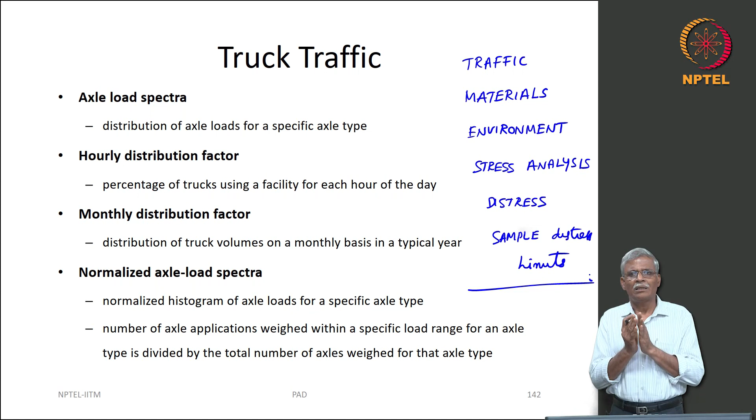Traffic, materials, environment, stress analysis, distress, and I will also show you some sample distress limits. To give due credit, AASHTO or the current MEPDG version is the one that actually put together traffic analysis on the most rigorous platform.

Let us take a look at each of these things. If you are watching this lecture, I request you to pause and write down these definitions. First and foremost is the axle load spectra: this is the distribution of axle loads for a specific axle type, determined as a statistical distribution.

Then comes the hourly distribution factor: the percentage of trucks using a facility for each hour of the day. This is used later in the distress computation, and this is where MEPDG relates traffic to material, to environment, to stress analysis, and finally to distress. Now you will understand how comprehensive this is.

To give a simple example, let us say you use the load equivalency factor and come out with 30 MSA. Now someone can ask, this 30 MSA is for 30 years, so let us take 1 month and say we have something like 0.1 MSA. Now, where is this 0.1 MSA applied — morning, afternoon, or evening?

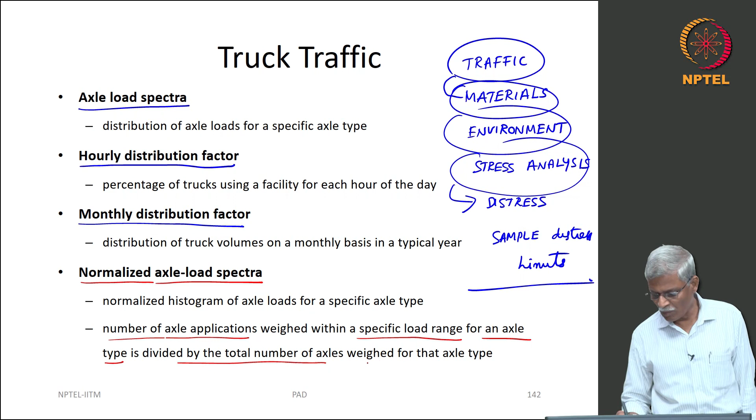When you say normalize, what you are trying to do is create a common platform, so that it becomes easy to compare across different axle types. So it means the number of axle applications within a specific load range for an axle type, divided by the total number of axles weighed for that particular axle type — that is your normalized axle load spectra.

To give an example, this is from a published paper — you can see this is a single axle, dual, and tandem. If you take a look, this is the variation you see for different types of vehicles: class 4, class 5, 6, 7, class 8, 9, 10. Each of these classes will have different types and different numbers of vehicles.

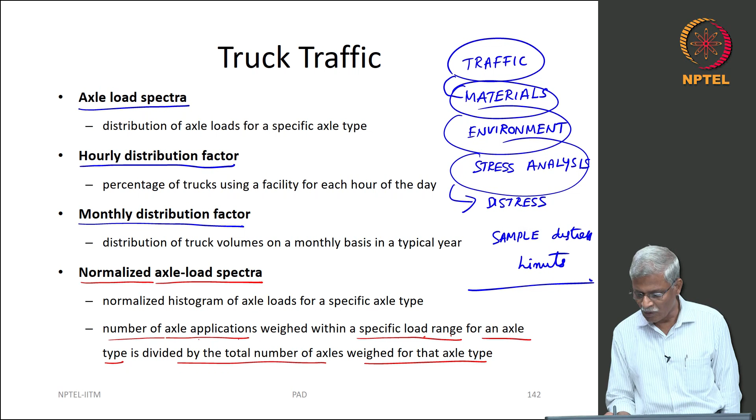So what you are now trying to do is put all of them on one platform, because we want to find out the axle load versus the percentage axle. So if class 8 had let us say 100 vehicles, class 9 had 50 vehicles, class 10 had 20 vehicles, what we will do is go back to the previous definition: number of axle applications within a specific load range for an axle type, divided by the total number of axles. So that is what we are trying to do here, dividing it by the number.

If you are really looking at dual, this whole thing, the middle one corresponds to the dual. So what you want to say here is 30% falls within this range, 15% falls within this range, maybe 12% falls within this range. So this is the normalized axle load spectra.

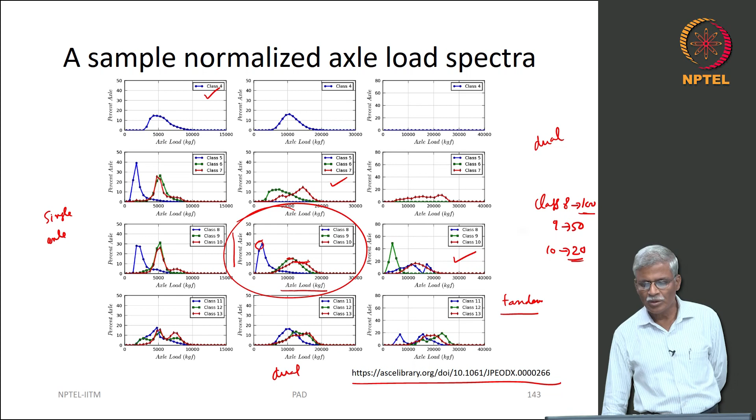Now comes the next classification, what is really called the truck classification distribution - the distribution of the number of truck applications for each truck classification for all the trucks counted. Let me reiterate, AASHTO will not do a load equivalency factor. AASHTO will take all the trucks for which you are collecting data from the field and apply it to the pavement, then compute the damage for each axle application. So all the truck data you are collecting has to be classified into different categories and distributions. We also have what is called the normalized truck classification distribution, which is a normalized distribution of the different truck classes within the traffic stream.

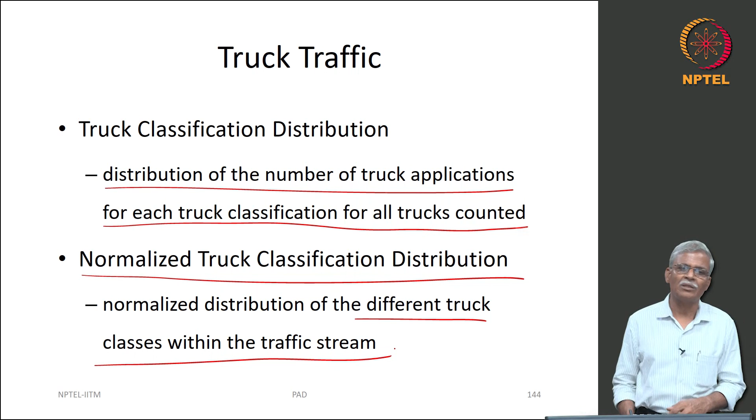Let me give a simple example. Truck traffic classification group means, for instance, if you take the major single trailer truck route, type 1, type 2, and some other types, which could come as 1, 2, 3. Now what you are saying is these 4 to 13 that you see are the different truck types. If you go and search, or I can share materials with you, truck class 4 will have one combination, truck class 13 could be something like dumper trucks.

What you really need to do is, if you take any truck route, that route is going to have almost these many trucks here, and it will be interesting to note that class 9 has a major proportion. Similarly, if you come to this TTC group here, you see this number has reduced, whereas this number seems slightly more here - this is more or less the basic idea with which these groups are created.

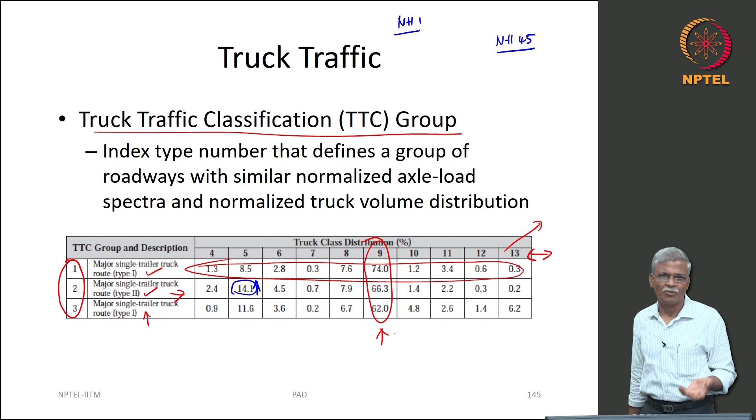So to understand: an index type number defines a group of roadways with similar normalized axle load spectra and normalized truck volume distribution. So let's say you are talking about NH 45, and some other NH 1 - each of these highways has different characteristics, as I have mentioned before. If you are a pavement designer, it is necessary for you to understand what type of highway you actually have. If it is NH 45, it may be one kind of highway that carries raw material from one place, sends it to a factory, gets it processed, and from there takes it to the port - that could be the characteristic feature of that particular highway.

Now what you need to do is analyze the traffic going along this particular highway in terms of the different truck classes likely to be using that facility, since you already have different classifications permitted by IRC. So you are going to say NH 45's predominant feature is this kind of category of trucks that are going to come, while NH 1's predominant feature will be some other category of vehicles. So this truck traffic classification group needs to be necessarily carried out - this is the most important thing.

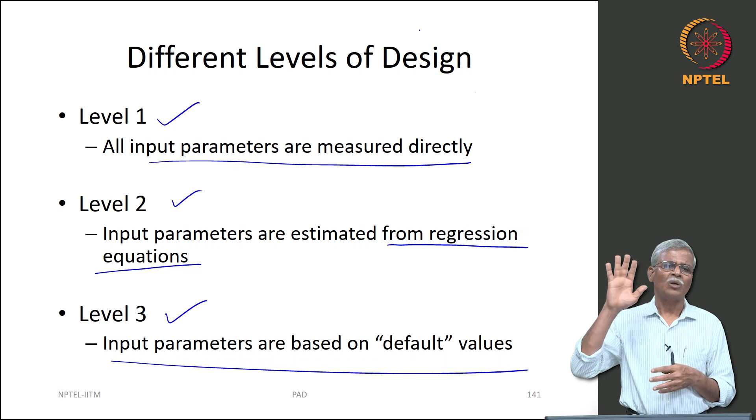So the point is, if you have these kinds of details worked out for the traffic part, then you do not really have any issue analyzing any national highway or state expressway as far as Indian conditions are concerned. Now why am I saying that? Let's go back to this - level 1. You will basically say for level 1 I need all the traffic data fresh, but if it is level 2, you will say I do not really need all the data, all I really need to do is find out what kind of TTC group and description it falls under.

Once you know it, most of the default values can be filled by you. That is the whole idea. Each highway has a specific distribution associated with it. The only thing that can vary is probably the intensity of the peaks or the volumes, but the nature of the distribution is not really going to vary, and that nature of the distribution has to be determined by you.

So if you are going to take a look at this particular highway and design it, all you really need to do is find out the total number of vehicles - you know the percentage distribution, so you will know the actual vehicle count, and now you can do the monthly distribution also, because we have talked about that. Let's say for this particular one it's 62%, and you want to ask how much is the monthly distribution. Then after that you also want to ask what is the hourly distribution.

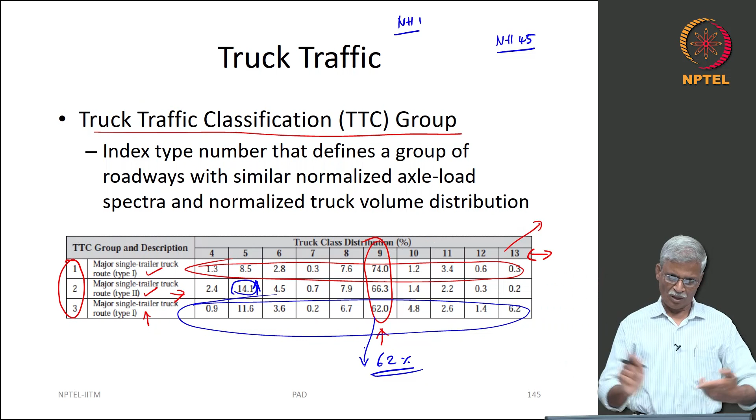So for every hour, every month, every year, for any specific truck, if you know what the distribution is, then doing the computation for the full year - taking into account the temperature conditions, material properties that change with respect to temperature, and loads that vary with respect to the hourly and monthly distribution - you can integrate all of them and compute the damage. That is the whole idea.

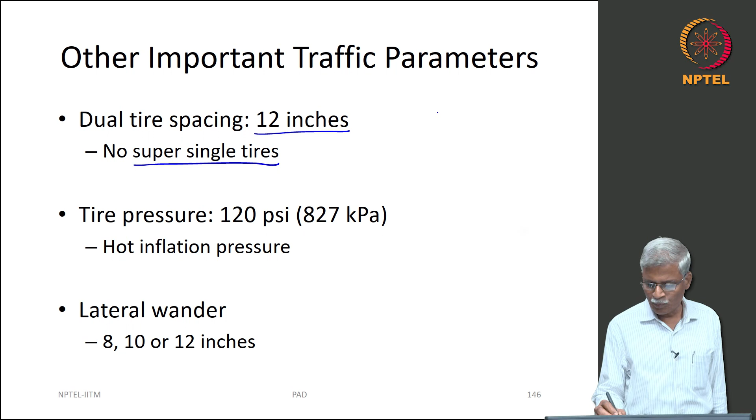There are a few other important traffic parameters that are mentioned but not actually measured. You can talk in terms of dual tire spacing. AASHTO also mentions what is really called a super single tire. In fact, if you go and take a look at some of the trucks on the national highway - let me draw something.

You might have something like this. Now these things might be lifted up or lowered depending upon the load that it carries, and these single tires carry a lot more load than this one. So these are called super single tires. As of now, AASHTOWare will not consider it.

Now the tire pressure that they want you to use is 120 psi, which corresponds to around 827 kilopascal. What is the tire pressure used in IRC 37? You may want to take a look at it, and you may also want to know that the actual tire pressure used in Indian conditions is a lot more than what you will actually see.

If that is the case, your strains are going to increase, and the damage is going to be accelerated.

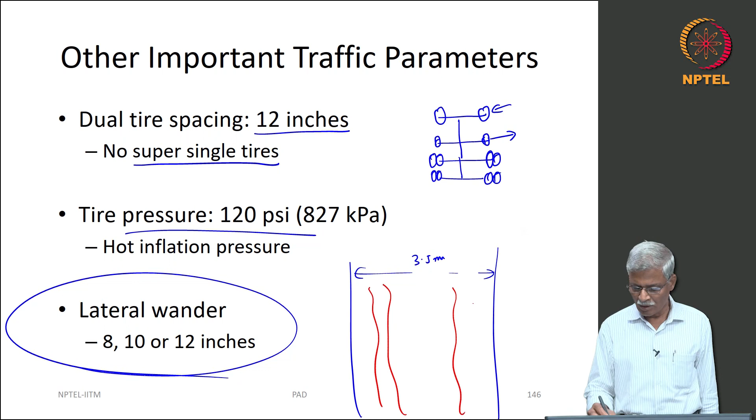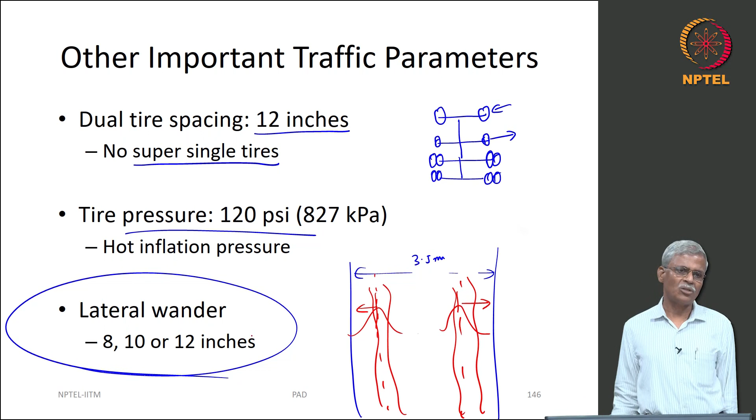Then there is also something called the lateral wander that you do. Basically, given any highway, you know the distance - 3.5 meters or 3.75 meters. So this is your location where you are going to have the axle repetition, and you can actually construct a distribution here. Now, from the mean, what is the standard deviation? That is what is really taken by you as some kind of wander. So it could be 8 inches, 10 inches, or 12 inches.

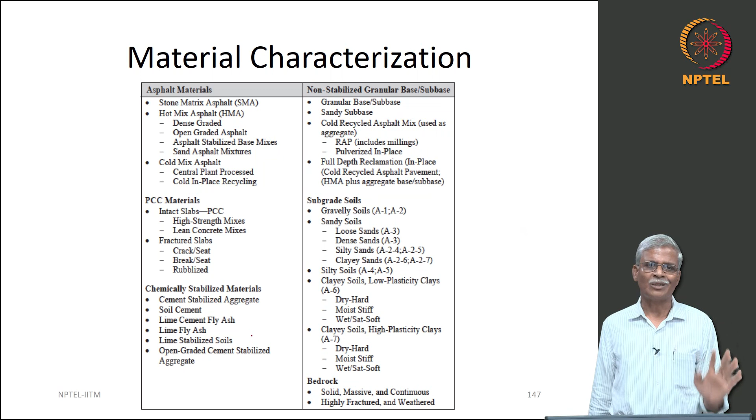So now we come to the next portion, which is really called the material characterization. What are all the materials that are allowed to be used as far as this AASHTOWare is concerned? I will be talking only about the bituminous material.

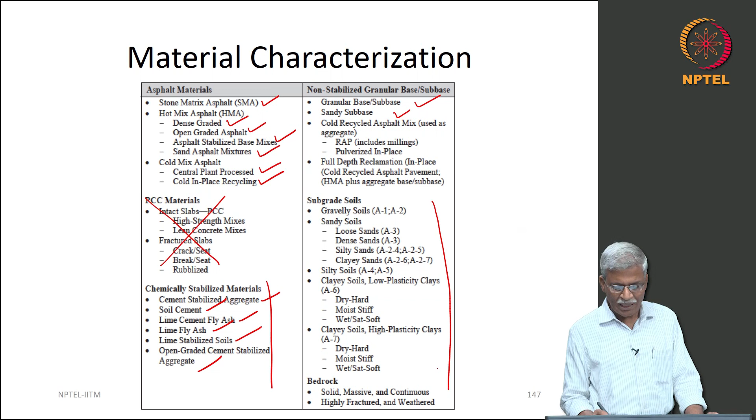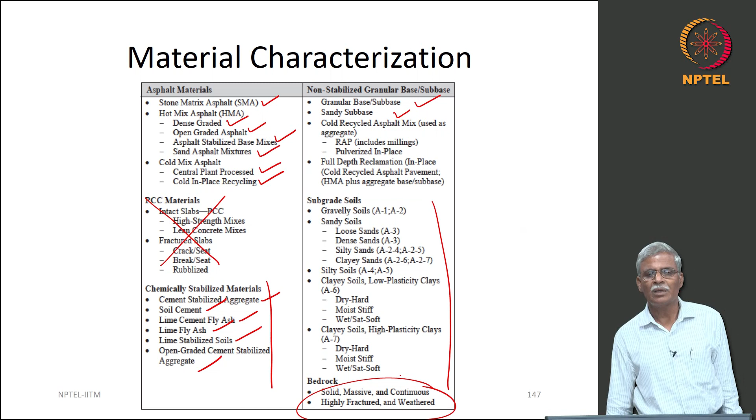You can have SMA, dense graded, open graded, asphalt stabilized base mixes, sand asphalt mixtures, and it could be central plant processed or cold in-place recycling. This technology could be with respect to foam or with respect to emulsion. You can have chemically stabilized material: cement stabilized aggregate, soil cement, lime cement fly ash, lime stabilized soils, open graded cement stabilized aggregate. Similarly, for non-stabilized granular base and sub-base, these are all the different types of mixes that can be used. The subgrade soil AASHTO classification is given here - A1, A2, A3, A4 and so on - and the bedrock details are given here. So this is the material that is likely to be used here.

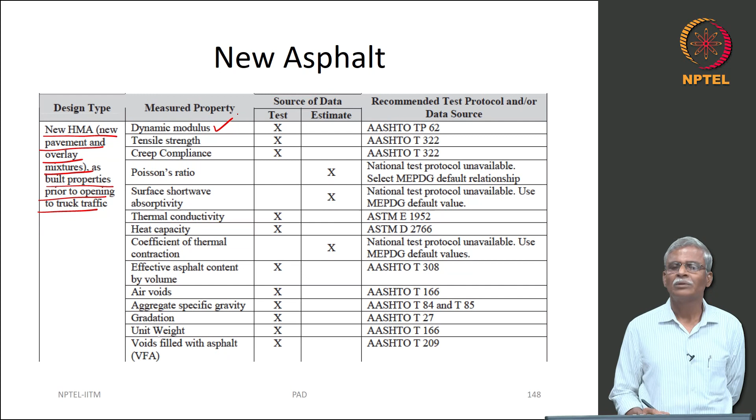Now, what are all the properties of the materials that you need to measure? As far as new HMA is concerned - that is new pavement and overlay mixtures - as built properties prior to opening to traffic, this is the dynamic modulus. We have discussed all of this in our material characterization of bituminous material. You can measure the tensile strength. Now you need to understand these are values that are expected to be tested, not estimated, and these are all the AASHTO or ASTM guidelines that are available here.

So, this is Poisson's ratio, they want you to estimate it.

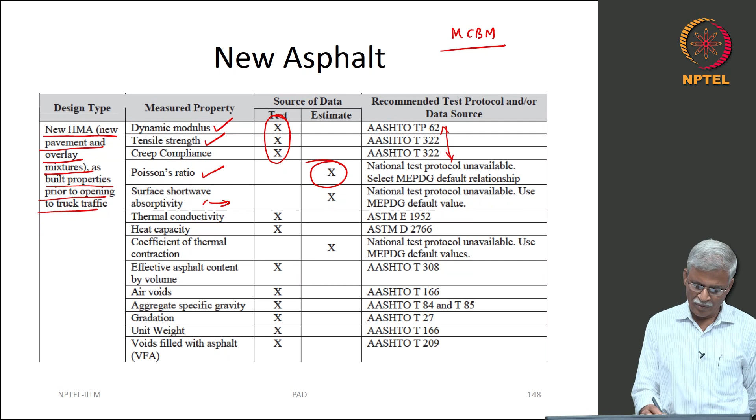You can leave this part, I will not be discussing this, because these are some of the things that will tell you to construct the heat transfer model that should be used for estimating the temperature within a pavement layer from the surface.

Okay, so these are all some of the things. The effective asphalt content by volume goes for the fatigue calculations, air voids, aggregate specific gravity, gradation, unit weight, voids filled with asphalt - so all of this goes into the fatigue calculations.

So now you can understand these are the sequences that need to be determined, and in fact, ideally all this information should be detailed and explained in IRC 37.

IRC should be part of it, FWD related information should be part of it, mix design should be part of it, because when you are really talking about pavement design, you are not really talking about pavement design alone, you are talking about analysis of traffic, material characterization, distress characterization and everything.

So that is why the overall AASHTO pavement design method that you see here, the green color book that I showed you, maybe 180 pages.

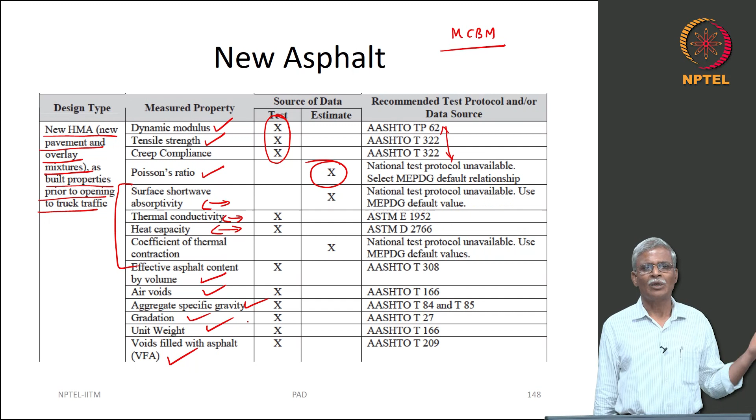But the original AASHTO design guide, with so many annexures and appendices and all those things, runs to more than 2000 pages, right.

So when you are talking about an existing HMA in which you are trying to find out what is the structural capacity, you are talking about running an FWD and computing the back calculated modulus, Poisson's ratio is estimated, unit weight, asphalt content, gradation, air voids and asphalt recovery.

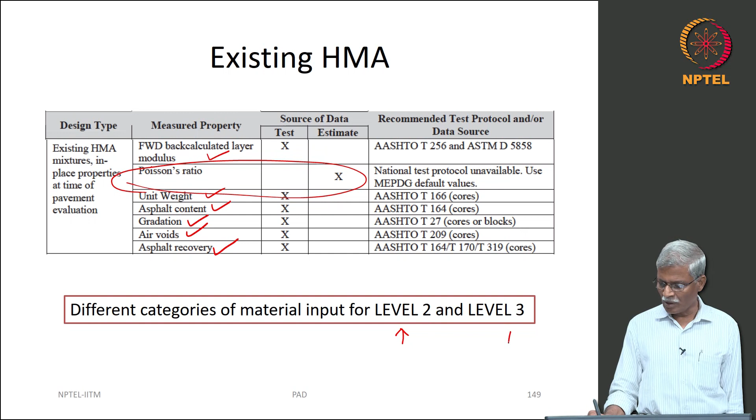Now, similarly, different categories of material inputs are needed for level 2 as well as level 3.

Now, let us come to the granular material. For the new and existing granular material, there are either two options. I am going to explain this in more detail, though this would have already been discussed earlier.

Now, let us take a small break here to take a look at what exactly this is. So now if this is your pavement layer, I am sure you would have worked out all these calculations.

So let us focus our attention on the second layer alone and let us look at different spatial positions.

So let us call this E1, E2, you apply a load, okay. How much do you want to apply?

You want to apply something like, let's say if you follow AASHTO, you want to apply close to, let us say we will apply 900 kilopascal, why not, roughly, right.

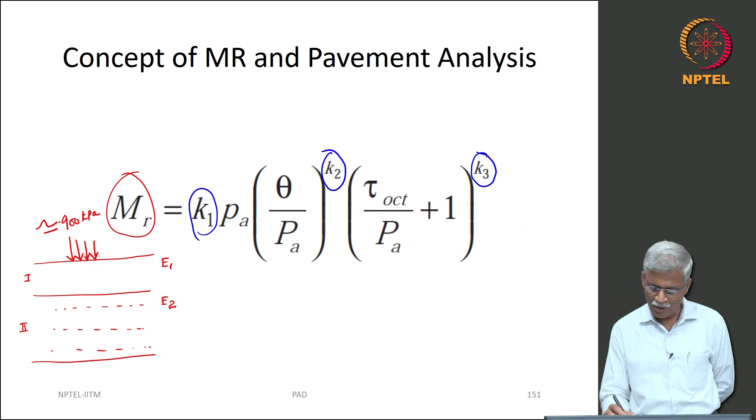K1, K2 and K3. So you can leave this out, you can also leave this out, this can be taken as a normalizing pressure. So what you are really looking at is theta and tau oct.

Okay, so how do we find out this theta? Theta is nothing but the trace - sigma 1 plus sigma 2 plus sigma 3, that is what it is. And what is the octahedral shear stress? That is given by this particular formula which you are familiar with, right.

So what we can do is the following.

How do we estimate this octahedral shear stress? I can estimate the octahedral shear stress if you know sigma 1, sigma 2, sigma 3.

But for me to get sigma 1, sigma 2 and sigma 3, I need a material modulus, but that is the material modulus that I am planning to estimate using this equation.

So what I would do is, knowing K1, K2, K3, I might have an average value. So let us say 600 MPa to start with.

So substitute 600 MPa for whatever value that you have got here, compute sigma 1, sigma 2, sigma 3 here, substitute it here.

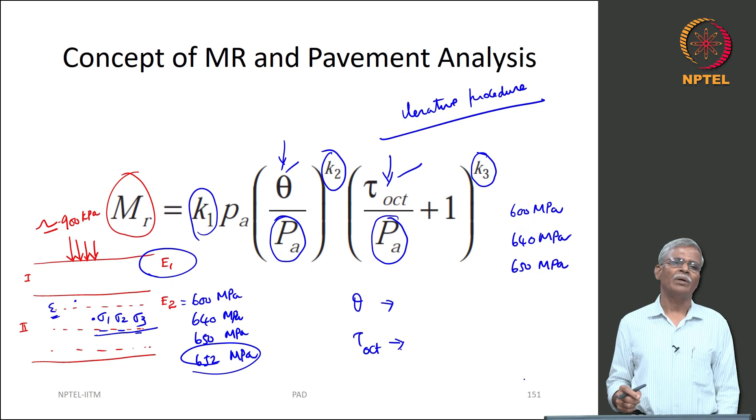You do it repeatedly till you determine the modulus, and then use this modulus to compute your various strains. So this is an iterative procedure, and it should be applied for every month, and within every month for every hourly period, where the temperature variation changes for every truck class.

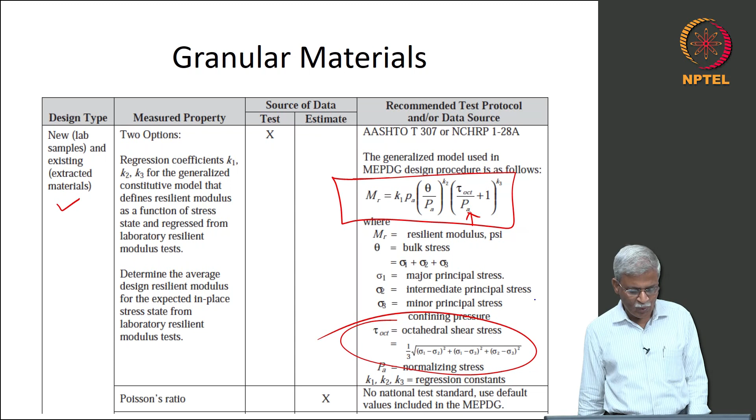You can instead say there isn't a big difference between 600 to 650 MPa, and the computational effort to determine this load dependent or pressure dependent modulus is too much. So what I'd like to do is get some estimate of the average modulus for the expected in-place stress state. I know the load that's coming, and I have an estimate of the stress state, so I use that stress state to compute the modulus, but then use this modulus for all my stress-strain calculations.

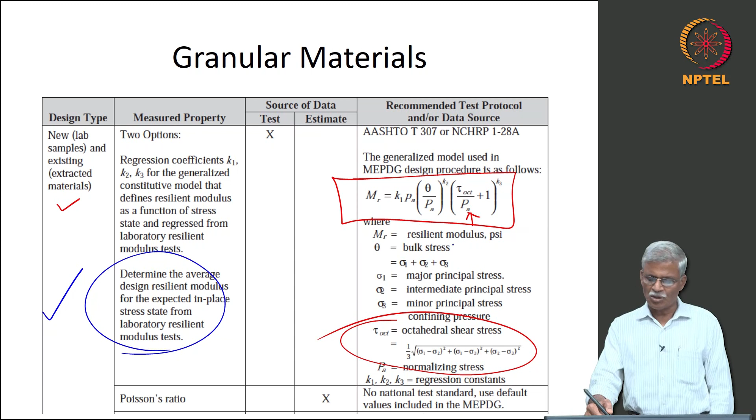This is the method currently being followed, but the iterative method has to be used when you have so-called inverted pavements, because in an inverted pavement the material response is strongly dictated by the pressure generated in that stabilized material, so it will not be straightforward.

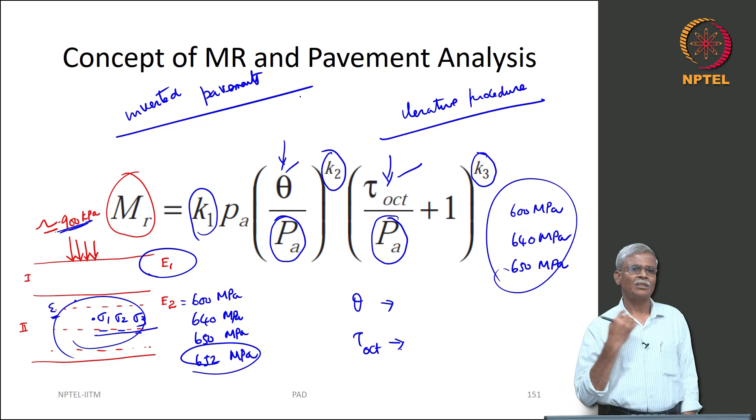I'm not going to get into the pros and cons of inverted pavement in detail since I already discussed this when talking about the South African pavement design. If you ask me, I'm more in favor of a balanced pavement, where the modulus and thickness variations are gradual so that the stress distribution can be controlled in the manner you really want.

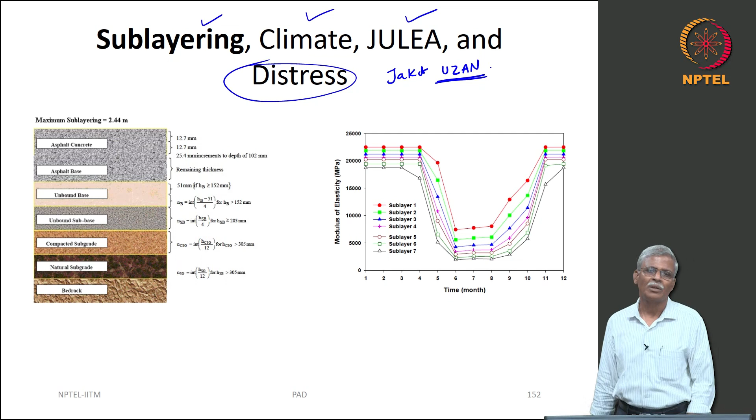Now comes the next portion, the three things related with distress: sublayering, climate, and the layered elastic program used, called Jacob Uzan's layered elastic analysis. Professor Uzan is a famous pavement engineer from Israel, and he was part of the MEPDG team to develop this layered elastic program.

Now take a look at this typical pavement section. You want to know, can I just use modulus values for one single section alone, or should I divide it into different types and have different modulus values for each? That makes sense, so let's say I divide it into two portions here.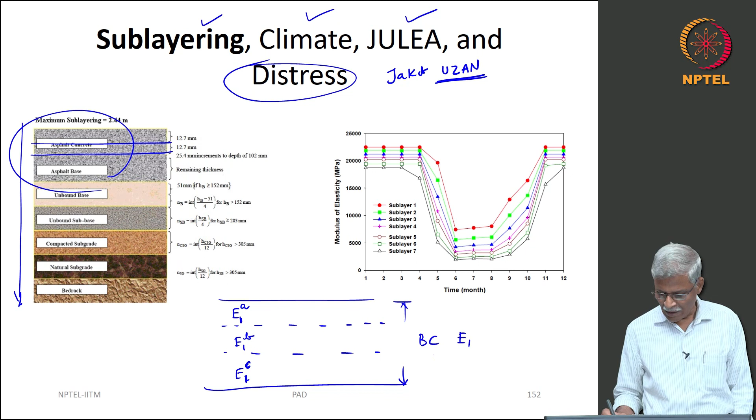Let's assume this is the topmost layer, bituminous concrete, with modulus E1, which I'll further break into E1A, E1B, E1C. In addition, let me show the temperature variation across this thickness, the temperature here, here, and here can each be different. So depending on temperature values and spatial locations, the modulus values can vary.

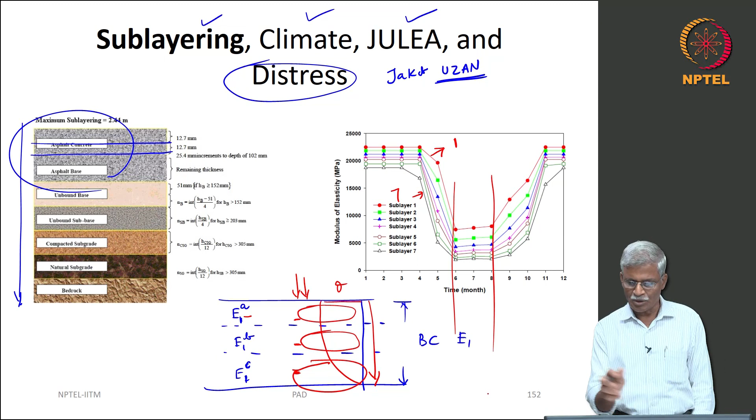So if I account for all this, when I apply a load here, I need to compute it at each location depending on the spatial sublayering as well as the modulus value changes. These sublayering values also change depending on the month of computation. For example, in a summer month the temperature substantially increases, so the modulus value decreases. You can see this is layer 1 and this is layer 7. So when computing damage, you're working in terms of month, hour, and layer, and then doing the calculation.

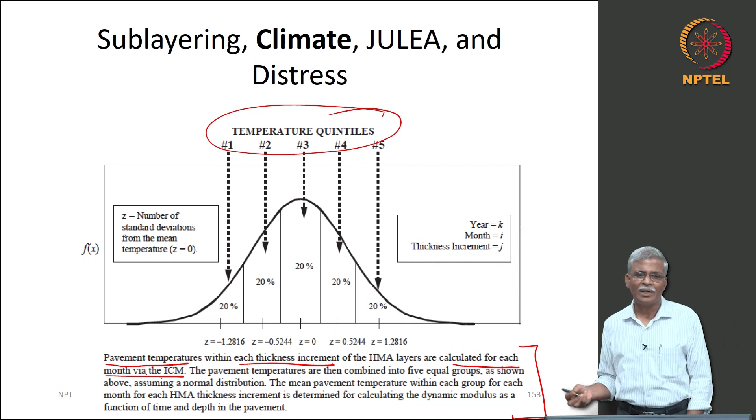Now let's see what to do with the climate, speaking only in terms of temperature quintiles. I've provided explanatory text here in case you can't follow, so you can read it yourself. Pavement temperatures within each thickness increment, each sublayer, are calculated via the integrated climate model, which we've already discussed. The pavement temperatures are then combined into 5 equal groups assuming a normal distribution.

The mean pavement temperature within each group for each month for each HMA thickness is determined for calculating the dynamic modulus as a function of time and depth of the pavement. So that means you are looking at kth year, ith month, for the jth thickness increment. So this is the quintiles that you are going to have.

What you do is use ICM to determine for each and every thickness increment what is the pavement temperature. Then you take this pavement temperature distribution, assume it is a normal distribution, and divide it into 5 groups, called quintiles. For each quintile, you take the mean pavement temperature and use this mean pavement temperature for each HMA thickness for computing your modulus value. Now use this modulus value in your detailed distress computations.

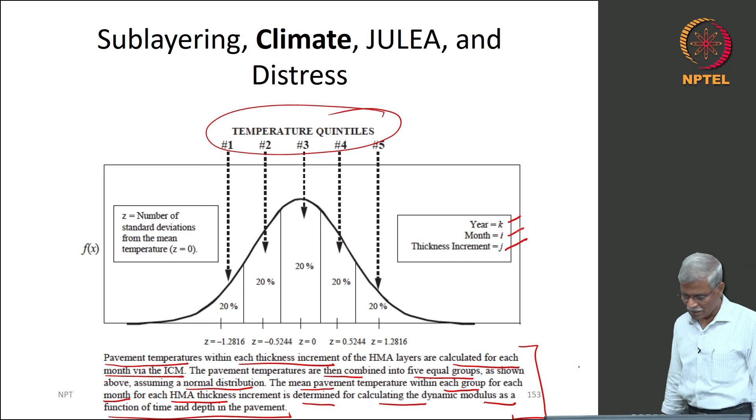So how do we do this? Of course it is quite expensive. The whole AASHTOWare Pavement ME Design, expensive version, costs a lot. You can find out, if you go to the website you will be able to find out, there are many tools that are available.

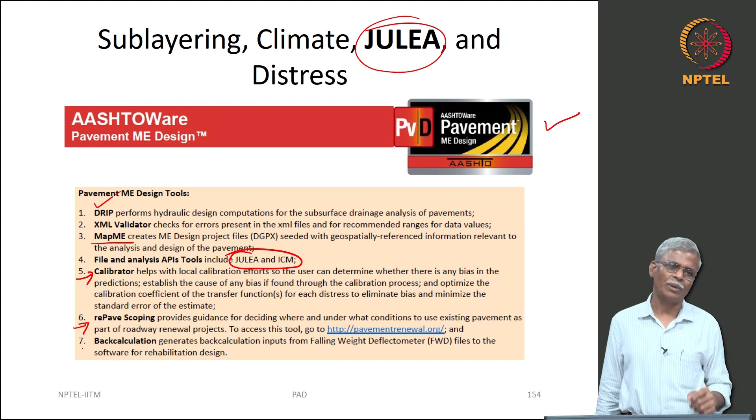One is really called DRIP, that takes care of the subsurface drainage calculations. Then, if you are living in the US and trying to do a pavement design for any county, you can actually take the ME Design project files based on the specific location. JULEA and ICM are also part of it. Calibrator is used, and then you are talking in terms of where and what condition to use existing pavement as part of pavement renewal. So rePave scoping is for the renewal part, and of course there is back calculation also given here.

So now let us come to the distress part. You have done the sublayering, you know the quintiles, you have the JULEA software for computing the stresses and strain. Now they have to be computed back to the distress. Now what is the first thing that you are going to do?

You are talking in terms of the accumulated permanent deformation in a layer or sublayer. Of course if you have many sublayers, you sum it up. That is delta P. Now delta P is nothing but accumulated permanent strain times the thickness of the layer or sublayer, that is what is given here.

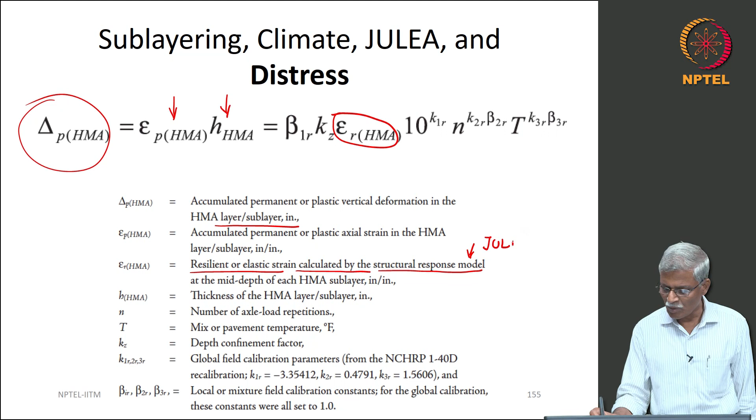I want you to pay close attention to a few things here. What is epsilon r? Epsilon r is the resilient strain or elastic strain calculated by the structural response model. What is the structural response model? That is JULEA, at the mid depth of each HMA sublayer.

Now you should start thinking, how is it that you are trying to compute accumulated permanent deformation from elastic deformation? Elastic strain. How are you computing the permanent strain from elastic strain? Very simple, what is normally assumed is that you have reached the resilient state. So now go back to this picture that we drew before. This is your total strain, this is your number of cycles.

Epsilon total, this is epsilon plastic, this is epsilon r. So what you are saying is that plastic deformation and the resilient deformation are related to each other. My JULEA program can compute only the elastic strain, that is computed here. Now for me to find out the rut depth, I need the plastic deformation, so I am going to use a whole bunch of other factors to take care of many other things. Here I am assuming that resilient strain and plastic strain are related to each other.

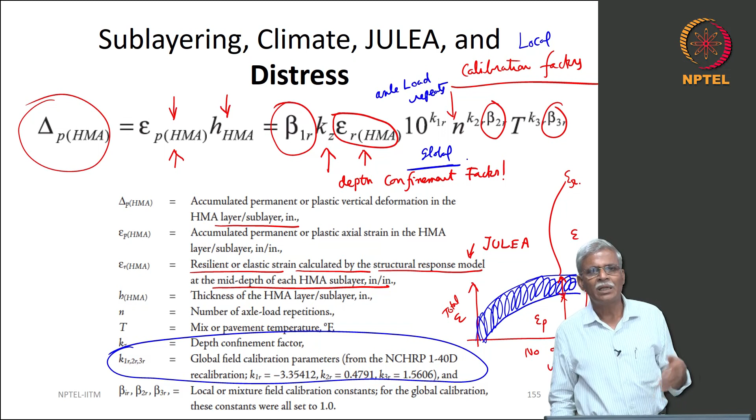One is with respect to the mixture, the difference in the mixture, another is with respect to the environment or location in which they are being used. So this is the model that you get for the permanent deformation of bituminous layer HMA.

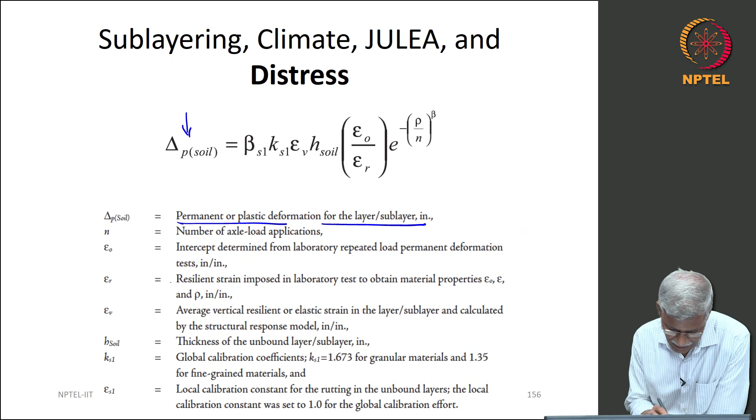Now let us see what we get for the permanent deformation of granular material. The same permanent or plastic deformation for the layer is given. Let us take this one, epsilon r. In fact, different types of strain components are used: one is epsilon v, another is epsilon r, another is epsilon naught.

Epsilon v is the vertical or elastic strain, vertical strain. Epsilon V and epsilon R is the resilient strain given by the structural response model. So this comes from the structural response model.

This comes from computing epsilon naught, and epsilon naught is the laboratory experiment based model to obtain the material permanent deformation test. So you can think of it this way, similar to what I explained.

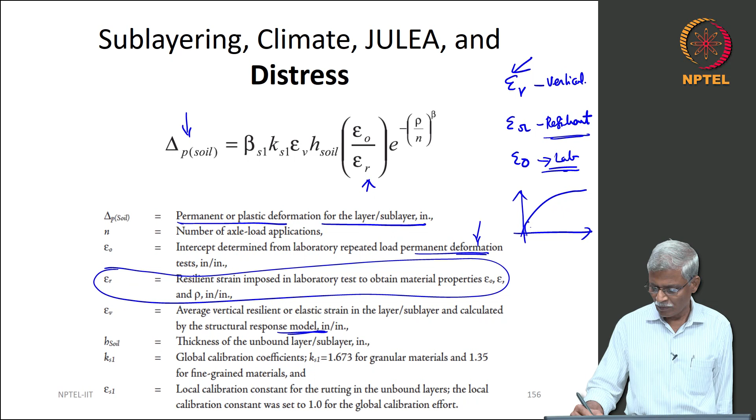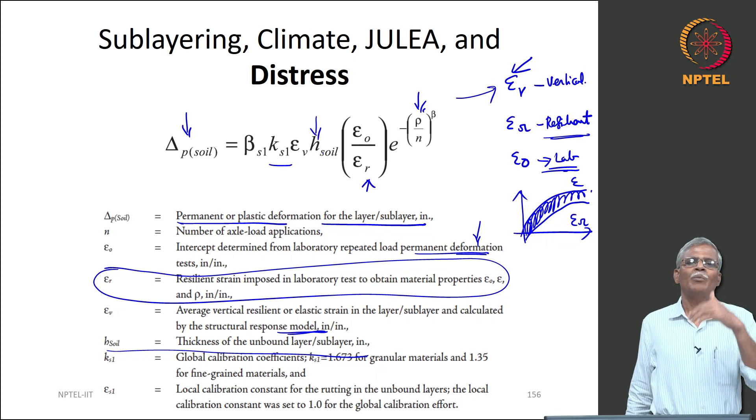So if this is what it is, epsilon R, epsilon naught, that is what is given. This comes from the JULEA program. Then you also have the thickness of the layer here, the density of the material here, and different calibration factors that are used here. So this is the permanent deformation in the granular material.

Now let us go to fatigue, allowable number of axle-load applications for a bituminous pavement and HMA overlays. This is the tensile strain at critical locations. This critical location can be on the surface of the bituminous pavement or at the bottom, depending on whether you are talking about top-down cracking or bottom-up cracking.

EHMA is the dynamic modulus, dynamic modulus in compression. Kf1, Kf2, Kf3 are global calibration factors, and similarly beta F3, beta F2, beta F1 are local. If you can do the calibration and set it to find it out, otherwise it is taken as 1.0.

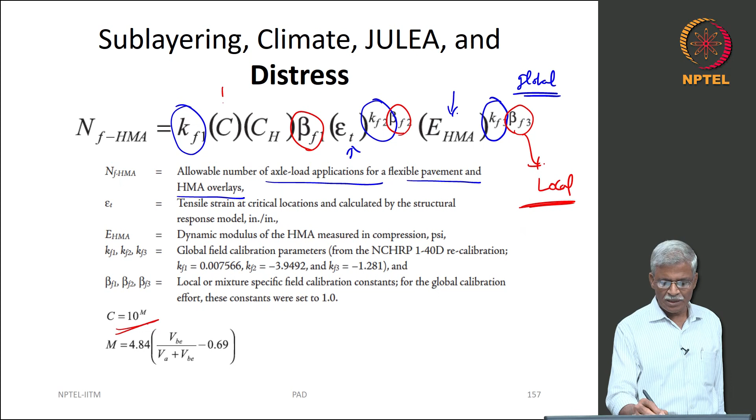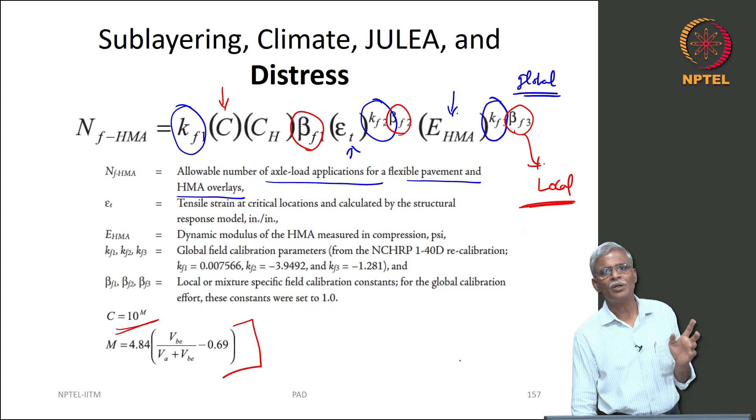Now C is something similar to what you have already seen in your IRC calculations, and you can see where your IRC equations are coming from. I will leave these things here, because if I have to discuss each and every one of these parameters, how they are calibrated and validated, it will take a few more hours. I only wanted to give a brief overview of how these things are done.

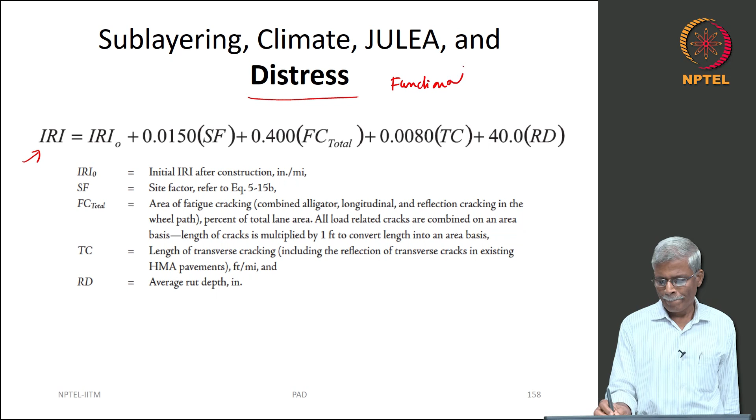Now interestingly, MEPDG also introduced the IRI. What they wanted to do is talk in terms of the functional distress. Now if you take a look at it, this is a site factor, so we will not worry too much about it. Now this one, this is an interesting equation.

RD corresponds to the average rut depth, TC corresponds to the transverse cracking, FC corresponds to the area of total fatigue cracking, and these are all related to IRI.

Now comes the important question: which came first? Whether you had roughness in your pavement because of the rut depth and transverse and longitudinal cracking area, or whether the roughness in the pavement induced this much of rut depth or transverse or longitudinal cracking, is something we do not know. In fact, what you are looking at is having all of these things interrelated to each other. This is how it has to be, but this is what you can say is a work in progress.

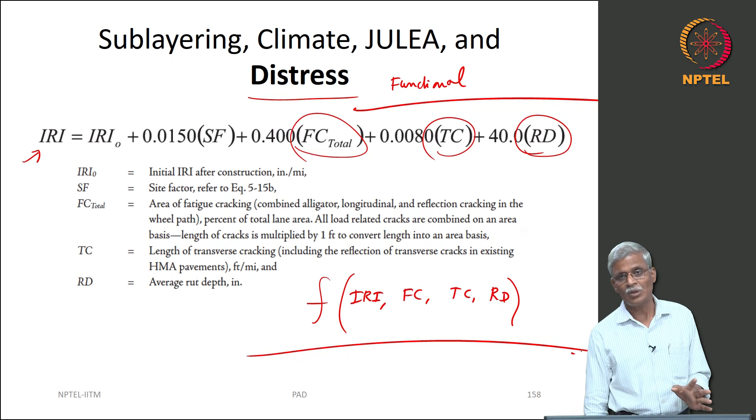We really do not want to get into those particular details, but this is a tremendous amount of effort that has gone in terms of collecting and validating this data.

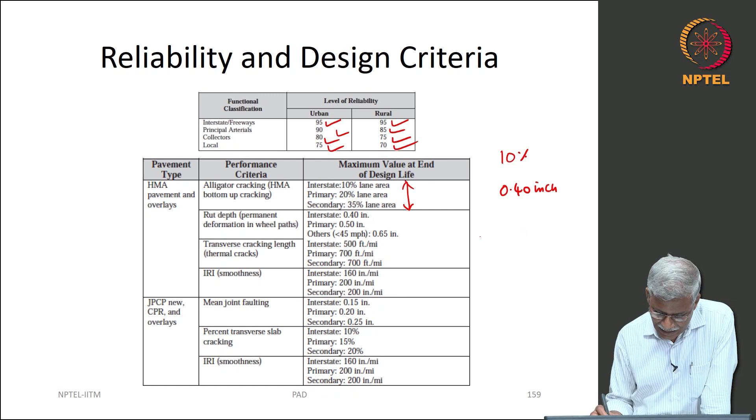So what is the value that you use in IRC, you may want to think about it. Rut depth for interstate is 0.4 inches - how much is that in mm, and what is the rut depth allowed in Indian Roads Congress, you need to think about that too. Then transverse cracking - do you have any criteria for that? What about IRI, what is the value given here and what is the value given in the Indian code? That is something we need to think about later.